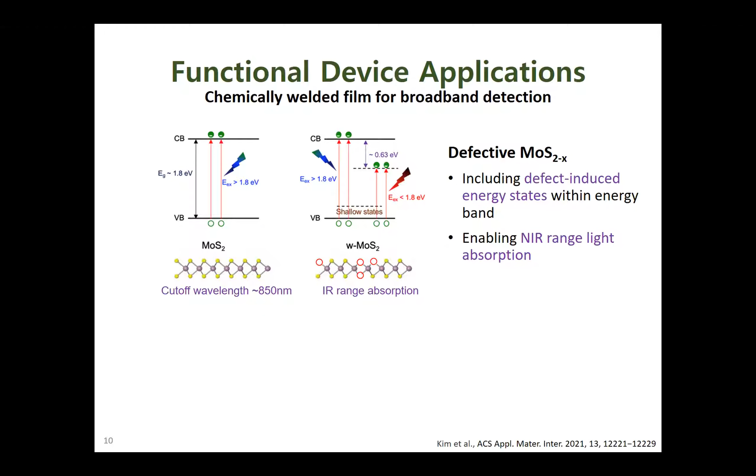Oh, it means you have introduced some more states in between CB and VB. Yeah, okay.

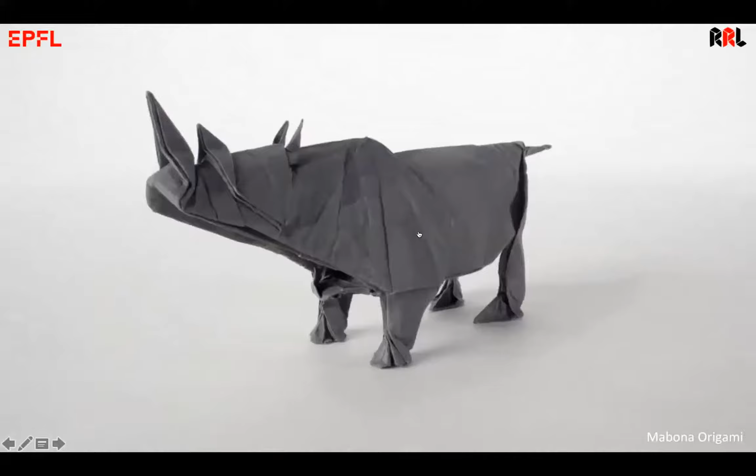So one of the things I think is really exciting for many of us in the domain of science is origami. I take inspiration from origami a lot because this is a platform that is seemingly very jolly and playful, but also it's the same platform that really transforms from one shape to another without actually having to change the platform itself. It's initially the same integral platform, which in this case is a piece of paper. And depending on how it's folded and how you're changing the sequence of the fold, it creates different forms and shapes.

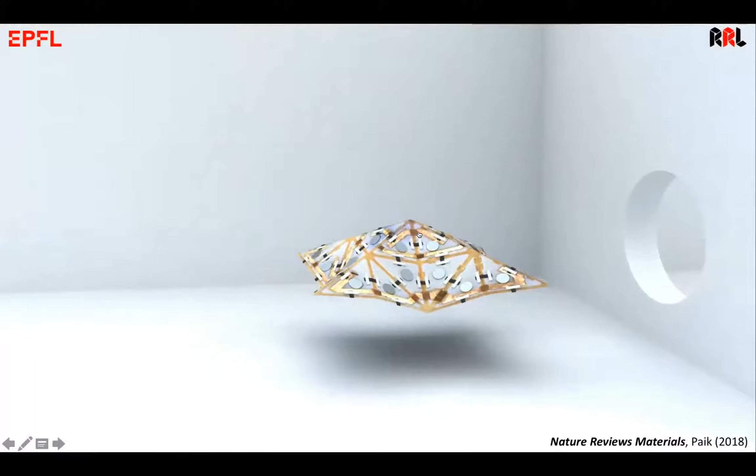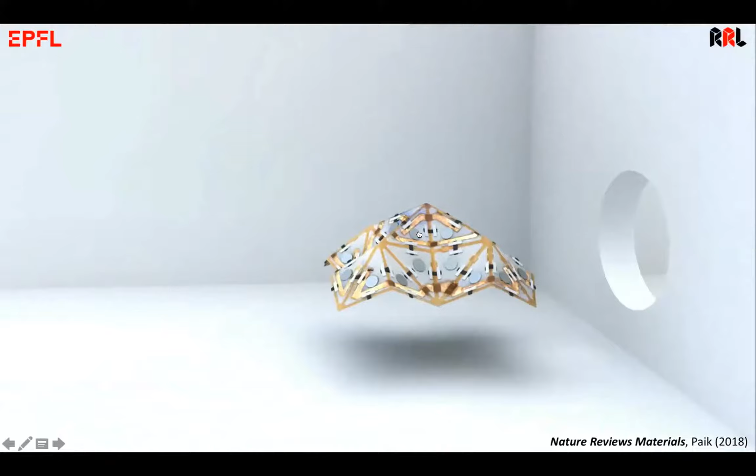And not only that, it changes the dimension. It starts off as a quasi two-dimensional platform, but depending on what you're folding into, it becomes a 3D object that changes forms. What if you had an automated platform that actually does origami itself? So when it's a completely flat sheet of robot in the beginning, as you see in the animation, it won't be able to carry out its mission on the other side of this small opening. But if it were to crumple its body, changing its form, it can actually have additional functionality by going through this small opening and executing a final mission. It's a very crude and very simple example of how form gives additional functionality.

But imagine if we do more than that. What if we create more forms that create more functions? And that's where the origami concept comes through, no pun intended.

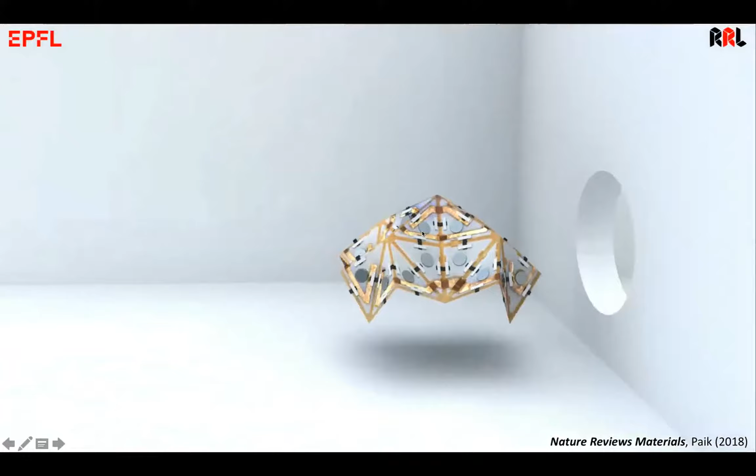Okay, let's go to the next slide. There we go. So what are the actual engineering and scientific challenges?

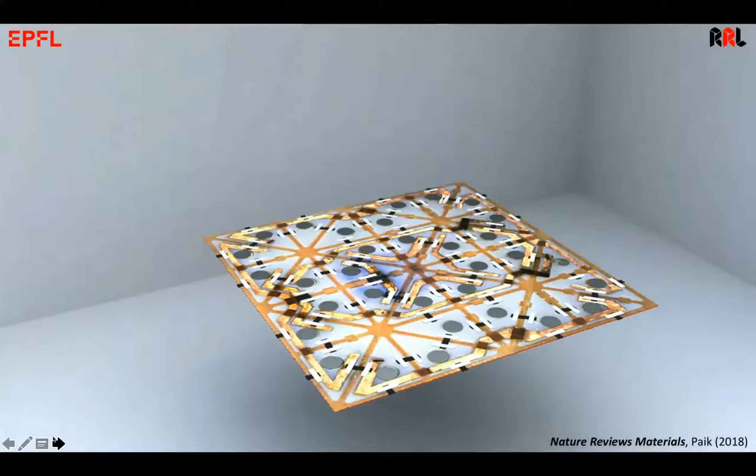If you want a flat form of automated system that can be programmed to fold into different shapes and sequences, what do you actually need? You need all the core components of a robot on a single platform - motors, sensors, processors, electric circuits, all on the same body. This is quite difficult because it's either a very high or very small form factor, but also you have to keep the integrity of all the core components throughout the transformation.

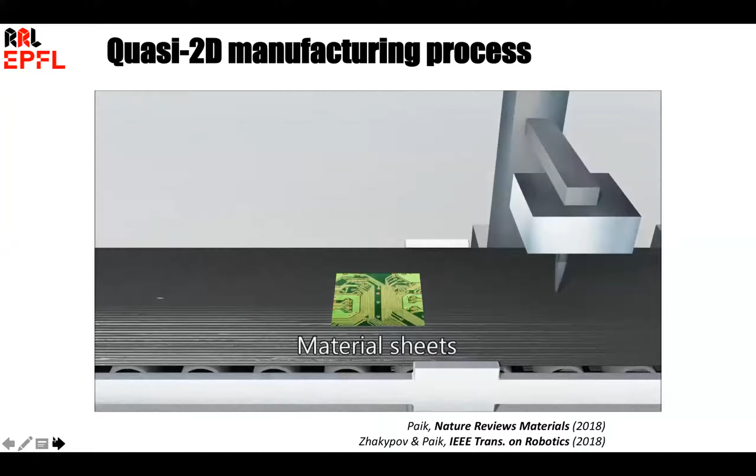So where do we get the idea how to manufacture this? We take advantage of an established manufacturing process, MEMS. In the established MEMS process, you basically go through this process. Let me just start the video from the beginning.

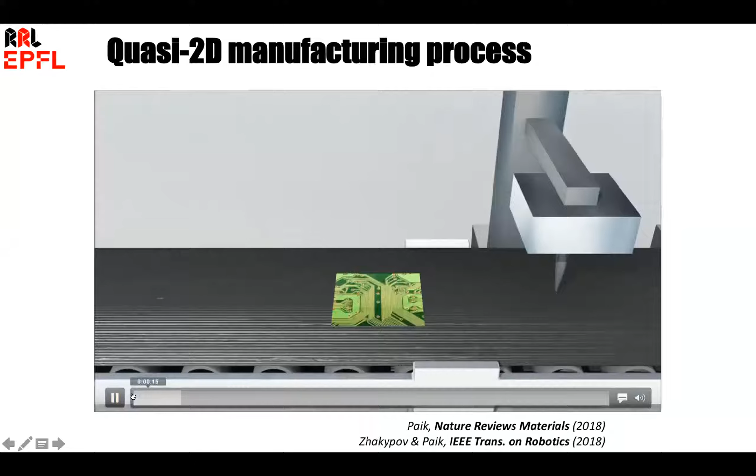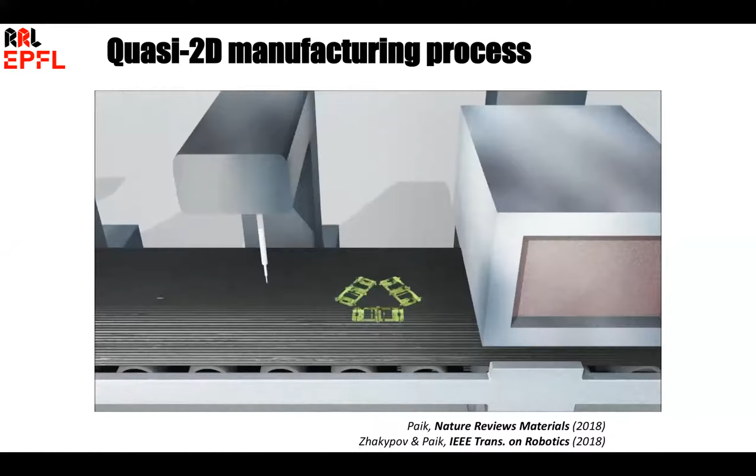You take the stock material, in this case a PCB material. You laser cut out the actual shape, the final shape you want to have. Then you multi-layer press multiple layers of sensors, actuators, circuits, and so on. Then you place discrete components that are not necessarily origami-made for the flexible folding.

But really the magic, or the uniqueness of the origami robot, happens right at the end. Once the assembly is completed, coming out of the reflow oven and including the final assembly, the major difference is that it's transformative.

It's self-folding. You create a completely quasi-2D platform of assembled stock - basically a stack of non-autonomous materials that are intelligently designed to put together. But at the end of the conveyor belt, you're able to create a self-transformative robot.

This basically means you're not getting a component out of the final assembly. You're getting a finally assembled robot at the end. And this is quite an exciting concept, and very powerful for that matter.

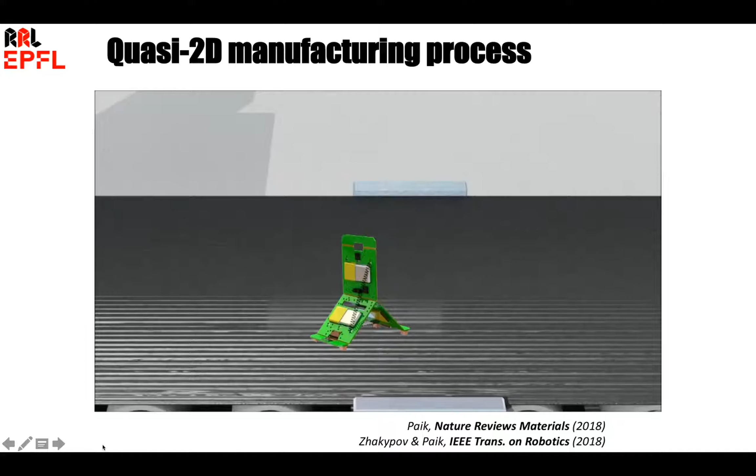The reason is that because you're taking advantage of the quasi-2D manufacturing process, you can pick and place literally different processes. Different materials can be added in the middle. You can add additional punching. You can add an additional pressing process depending on the final design.

And what does that mean? We're able to close a physical loop of customizing your robot that responds to specific commands. You can actually have an on-demand supply of robots that is design-iterated and manufactured at the final output.

So far in my lab, we don't achieve every single one of these tasks, but we have examples of robots that are taking some of these tasks and realizing it. In the future, what we're imagining is that because we can take advantage of this push-button manufacturing that can be called on demand, we're able to add additional intelligence within the system.

Having additional intelligence within the system, with additional layers or different design changes, will allow us to do more interactive interactions with robots and with environments. Some of the tasks we're currently able to achieve, some partially, some together, are computation, communication between robots, cooperation between the robots, manipulation with the environment, and mobility of their own.

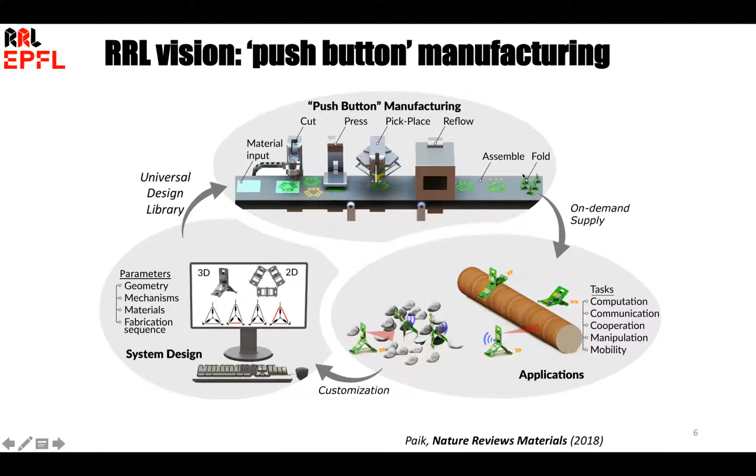Having robots with at least hundreds of components, if not thousands, minimizing this dimensional change actually allows us to have a very accurate and very loyal robot to its design. And imagine if you want to have a swarm of robots, it can drive down the cost very effectively without jeopardizing its mechanical as well as electrical capacity.

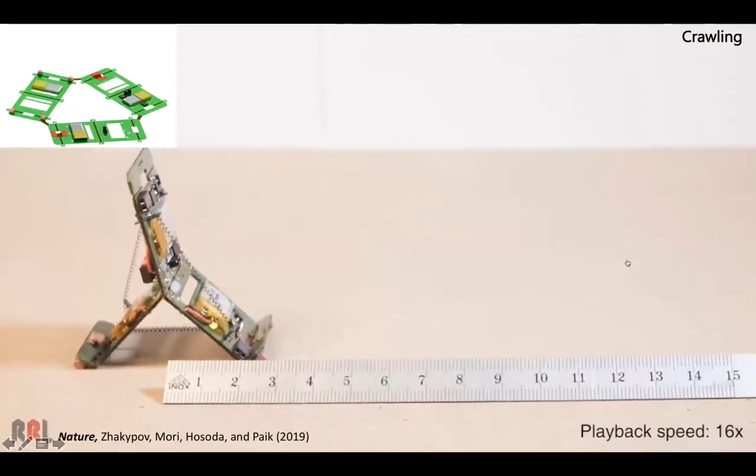So here are a couple of examples of robots based on this design theory as well as the design parameter changes. We start from the quasi 2D manufacturing process. You see on the left-hand top a GIF file. It's designed as a complete triangle and then self-folds into a crawling robot.

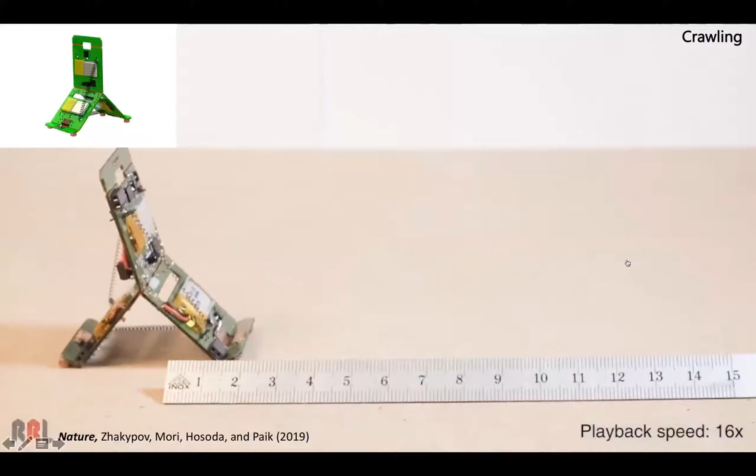What I was talking about earlier in the presentation was that we want to have a robotic interface that's intelligent enough to interact with the environment, but not by adding additional weight, additional design changes, or by iterating at the cost of just adding more stuff.

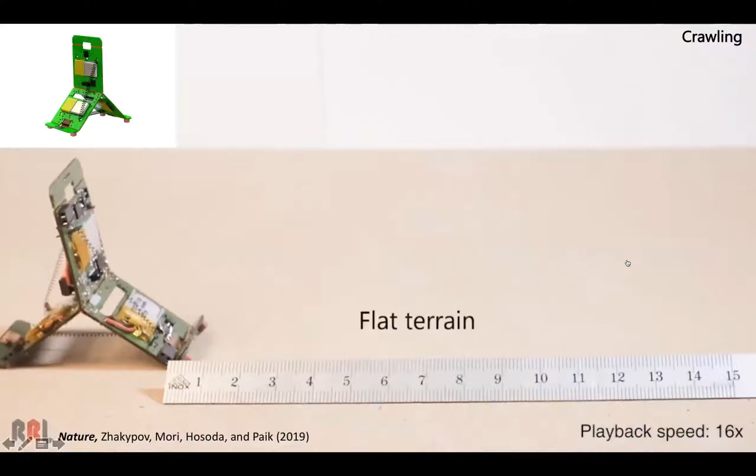Here's an example of a single robot, a tribot we call it, with 3 legs. It is able to change its locomotive pattern autonomously, depending on its terrain type. So what you're seeing here is that with this crawling locomotion type, it's able to crawl across a flat ground, doing a sort of inchworm motion.

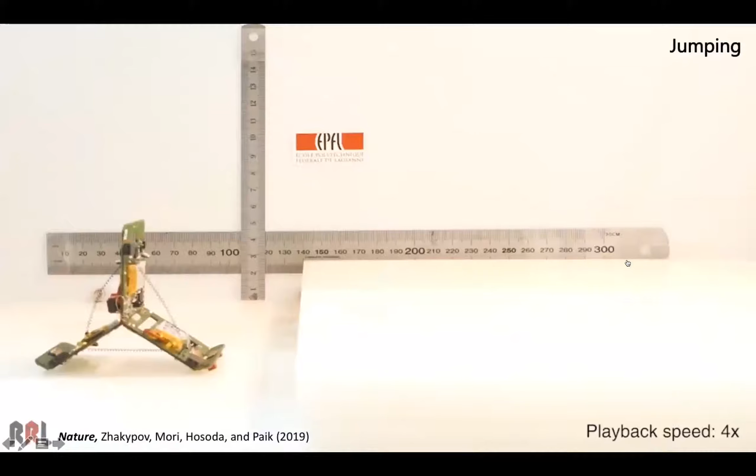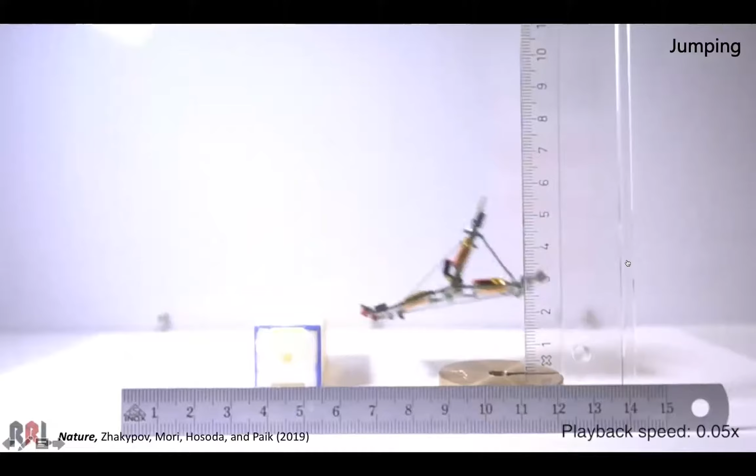We're just over the Olympics—it's playing its own Little Olympics as well. So the form, or the actuation sequence, can actually give additional functionality.

Currently these are very lightweight. As you can see from the rulers, it's about a palm-sized robot.

What we can do with this is have multiples. In our lab, we don't have a conveyor belt or an automated system that allows mass production, but with our students, we're able to create about 10 of these to display how they can communicate with each other and execute tasks that are a little more difficult for such a small robot with limited functionality in terms of sensing and communication.

This is very much analogous to how nature behaves around the environment with much agility. For example, ants do exactly the same thing. Individual ants are not that strong, but in groups they can create bridges over a stream of water, and access food sources that are far off compared to their body length.

So we can imagine having this type of origami design platform. We can create interfaces that are much more interactive with the environment, as well as with the users, because you can update its design according to the changing environment.

What you just saw before was a single platform origami robot that can do multiple tasks depending on how you activate different joints. What if we can actually make this modular? Modularity means different things for different labs, but in our lab it means a single module should be functional, but you gain more functionality by adding more modules around it.

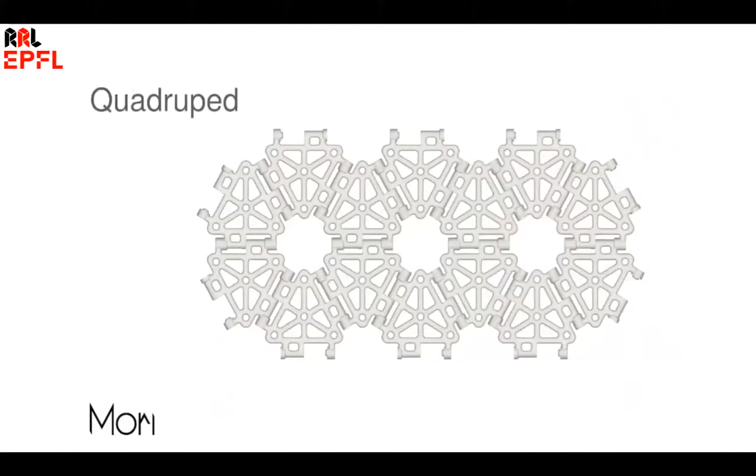So these are a couple of examples that draw a similarity to more classical tasks. But what is a task that goes beyond our classical tasks? Well, think about video games. Have you ever seen a video game or computer graphics and thought, I know that's CG, that cannot be real?

If it's CG, it cannot be real. Could we change that phrase and say, well, if it's CG, it could be real?

What I'm trying to get at is that when you're trying to create a physically viable environment in CG and computer graphics, you add a physics engine into the graphics. How do you do it? You first dissect the elements into a smaller meshing format, a polygon, and then apply structural mechanics, the behavior of material in these small mesh structures. Once assembled, you have a more realistic structure, either by surface rendering or by actual physical behavior.

Imagine if you can actually do this in a physical world, not just in computer graphics. What happens is you have individual meshes that are the smallest polygon, so it's a triangle. Those triangles will change resolution by the size of each module, but they're not necessarily equilateral triangles.

So if you could have a robotic or physical representation of these polygons that changes its distance, meaning you change the parameters of this triangle to create completely equilateral triangles, but that squishes or swarms into a different edge length, then you're really able to create a physical representation of a computer graphics.

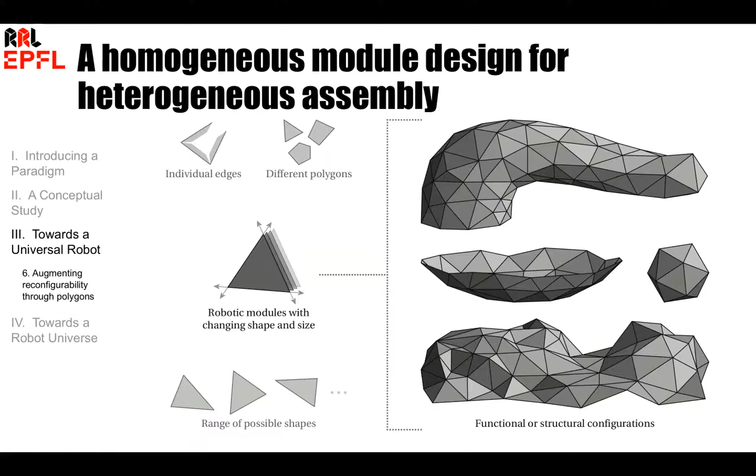Of course, the disclaimer is the resolution has to be really high. The edges should go from very minuscule to very large, but conceptually, it's something approachable.

One of the things we were trying to do with our industrial application is that maybe we don't need to be so fixated on resolution. If we can already achieve multiple degrees of freedom on a surface from a single surface with not much payload based on the number of degrees of freedom—payload comes from the motors, number of sensors—maybe we can achieve further interactivity.

So this is an example of how we are using our origami robots for industrial application. This is the back of an AVTR car, a Mercedes-Benz. This is the side, this is the back. Normally, this is where the airfoils would go in the back of the car.

So you see these airfoils on the back of the car, much bigger and many more than what you would normally have. Every single panel pops up and rotates around 3 degrees of freedom.

It was not necessarily designed for actually changing the aerodynamics of the car, but was designed to show the interactivity of the car driver with the people at the back.

So it's very much a socially aware car concept, but having that very flat panel that creates a high degree of freedom allows us to go for how the modularity of the system can add an additional layer of complexity to a surface that's meant to be completely flat.

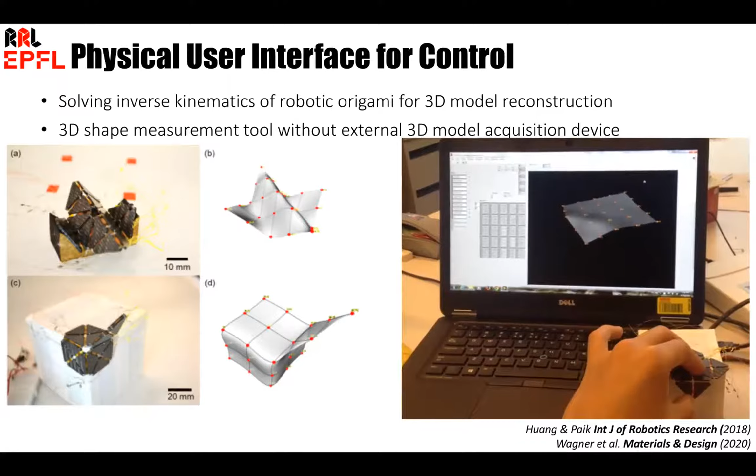Not only that—since I keep mentioning interactivity is super important—what if you don't have a physical representation of the origami robot? Not to worry, it's much easier to have a virtual platform, but then you would actually have access to the physical platform that's on the other side of the world in a different time zone.

And what's unique here is that not only can the virtual user control this robot interface, but you can have a second master who will be controlling this by touching as well.

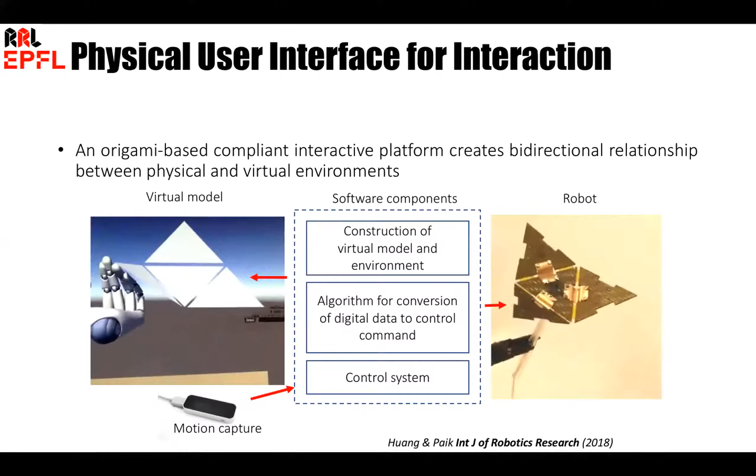So you would actually feel what the other master one in the virtual world, master two in the real world, are feeling from each other. And that really is the handshake of using robotic interface to transfer the physical intention of one user to another. This becomes a quite important topic for us.

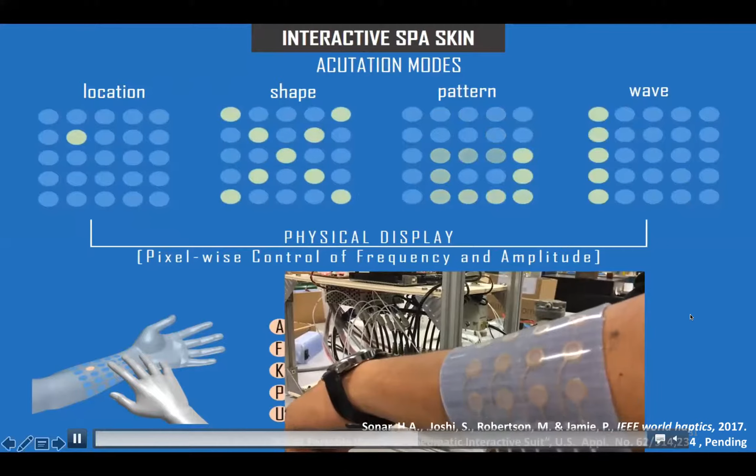And we are able to find, as a 5x5 grid, you're able to create and remember multiple words that is able to create short sentences. Let me see how far I can go. And then you're able to use the same interface to actually prove that you don't necessarily have to rely on vision to create and transfer information.

It's purely from the vibrations under your fingertip, we sent out messages of actual form of what kind of object we want them to test out. Here's an example where we sent out virtual tactile images that are only transferred by hand, and by doing so, we are able to ask the subject to create the object they felt.

So if you send an image or the virtual image of the sphere, square, and prism shape, they're able to recreate that just from feeling, replicating the form they were actually touching.

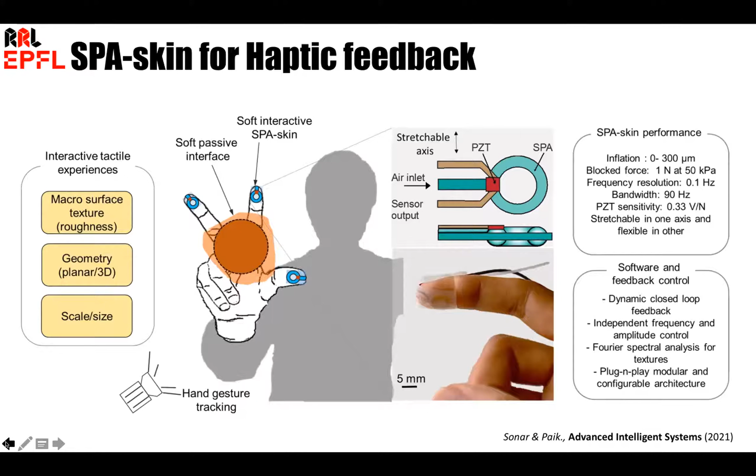So it's basically a blind test, feeling the different objects and telling you what they're feeling. And that is actually what we do for normal people without vision impairment.

And we have different versions of it using an origami platform that you can have different form factors as well as stiffness renditions underneath your palm. I can go over these a little later if you have more questions, but I will just go straight back.

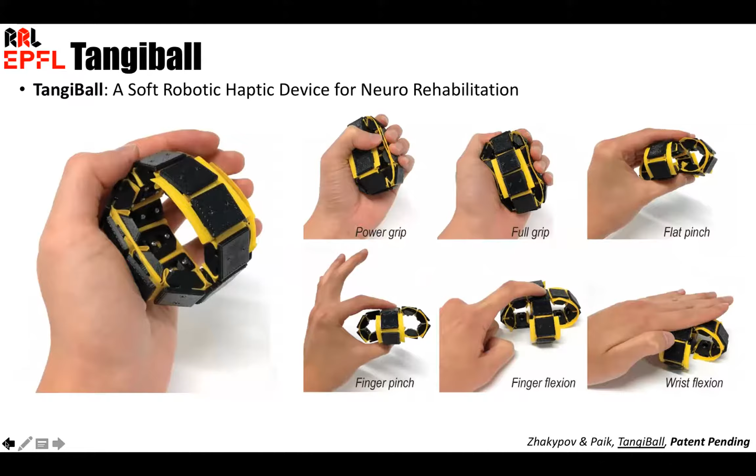That being said, I hope I have sort of intrigued your ideas, intrigued your senses, no pun intended, in terms of how soft reconfigurable robots can really be used for making human to robot interface much more interactive and much more real.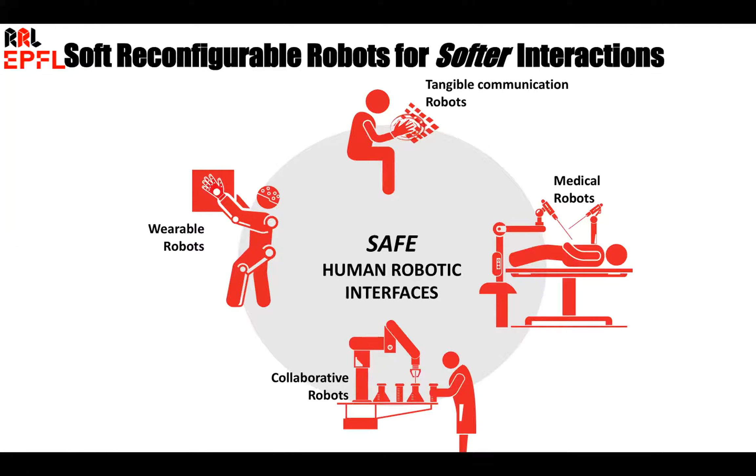And that I think is really important, especially for medical fields, especially for people during this period of pandemic. I just want to thank my students who are the key anchors of producing these amazing ideas and pushing that through, and my funding sources.

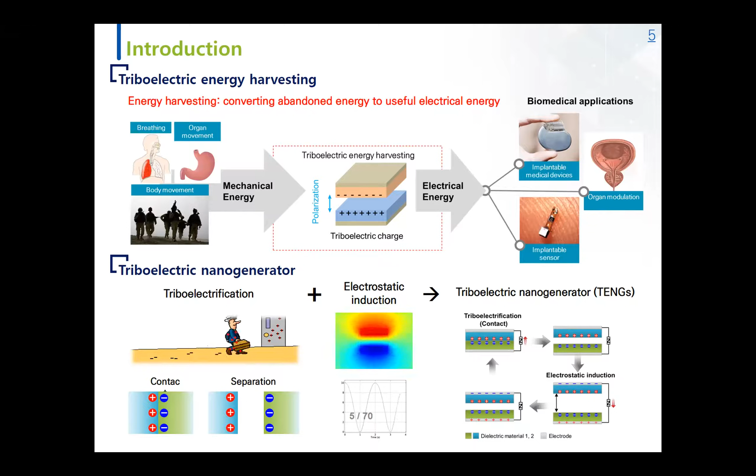So my concept has two backgrounds. First, the human body can generate electricity and can be a triboelectric nanogenerator, because the human body can generate triboelectric charges and has capacitive properties. It can be a good medium of electrostatic induction.

So as you can see, when we attach an electrode on some point of our epidermal position, output current is generated, which is enough to illuminate the LEDs.

Secondly, we found that SARS-CoV-2 also has negative charges, through evaluation using an electrometer.

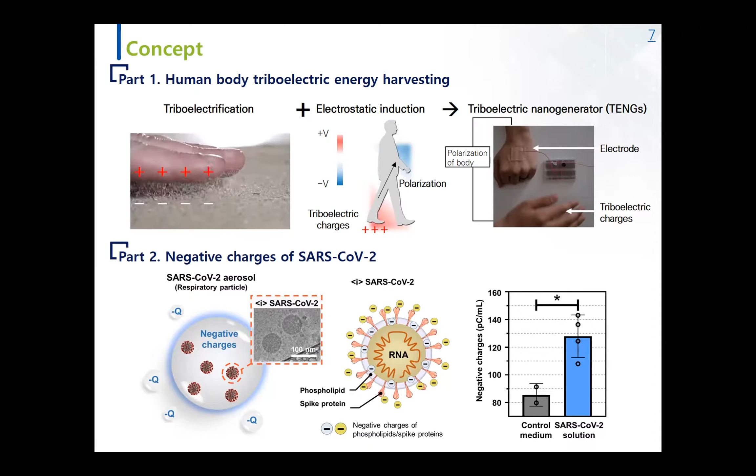Also, through an ex vivo experiment which mimics respiratory contact using SARS-CoV-2, we found that the virus in VBT drastically decreased by 92.3%.

So we characterized the output performance of the human body. When we contact PTFE or nylon with a naked hand or latex glove, it can generate from 20 to 80 microamperes of current.

So it is enough to charge the VBT, a 0.25 microfarad capacitor, to 180 volts in just 3 minutes. So it can be a promising powering source of VBT.

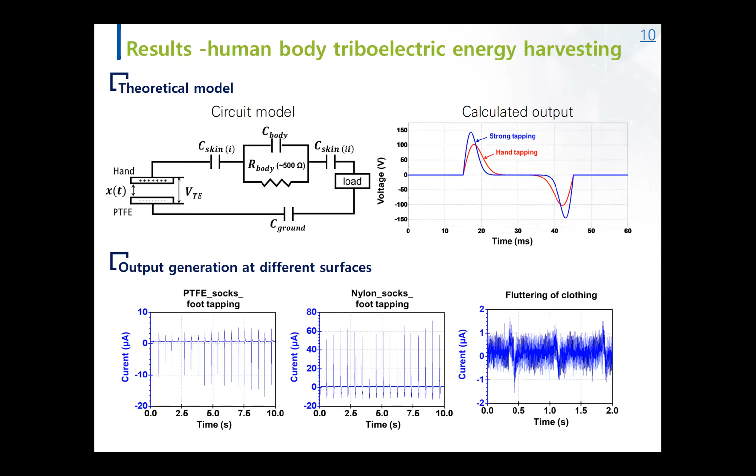Accordingly, we designed and fabricated VBT, which consists of two PEDOT:PSS coated silk textiles with a non-woven filter between them. The PEDOT:PSS silk textile is fabricated by a simple dipping and annealing dyeing process.

So finally, we carried out an ex vivo experiment which mimics respiratory contact. To evaluate the virus blocking of VBT, we measured virus copies in front of, within, and behind the VBT.

As a result, we found that 99.5% of SARS-CoV-2 is repulsed, and 99.95% is blocked by repulsing the particles.

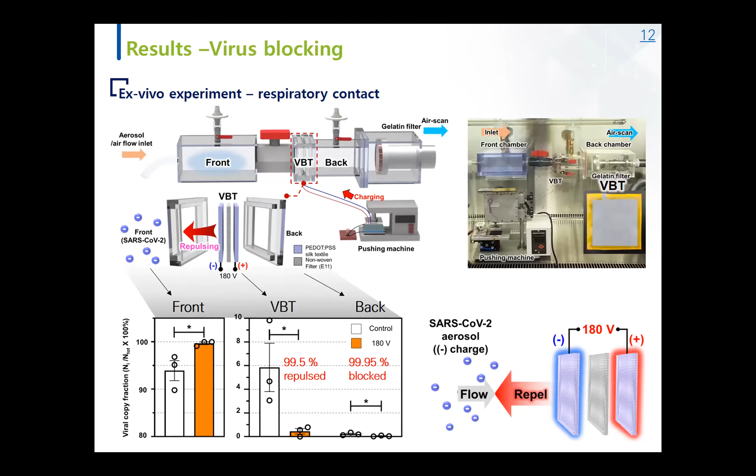So our VBT has several advantages and provides a breakthrough. First, it can provide continuous blocking through self-powering using human body triboelectric energy harvesting. Second, there is no surface virus, eliminating the possibility of secondary infection. Third, it has high blocking efficiency of 99.95%.

Furthermore, it can be a general solution for mitigating the spread of variants or future emergent viruses, because most enveloped viruses have negative charges, so we can repulse and block them using VBT.

In summary, we investigated highly effective virus blocking using Coulomb force and energy harvesting technology. Through the combination of the human body and Coulomb force, we achieve continuous, high blocking efficiency, no surface charge virus blocking technology. It can also be applicable to general enveloped viruses.

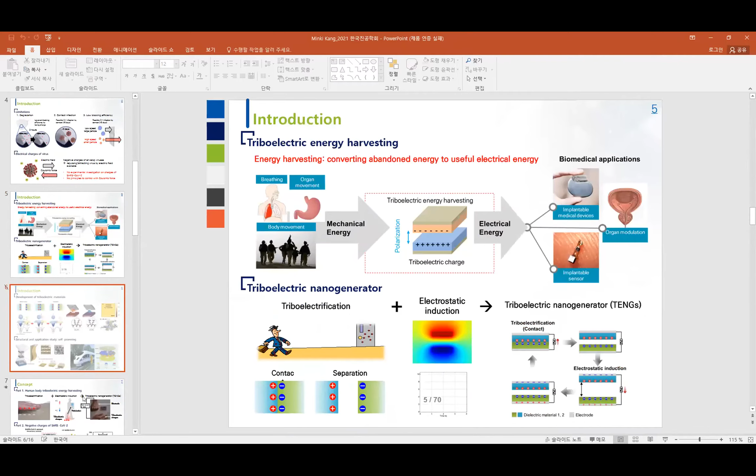You mean the triboelectric output performance? Yes. It is the same as in the video which I showed you. Just attaching a hydrogel electrode on the skin and through wiring, we used an oscilloscope and a current amplifier, and we just measured the current.

And in that case, with another hand or foot, when we just tap on PTFE or nylon film, we can measure the output current.